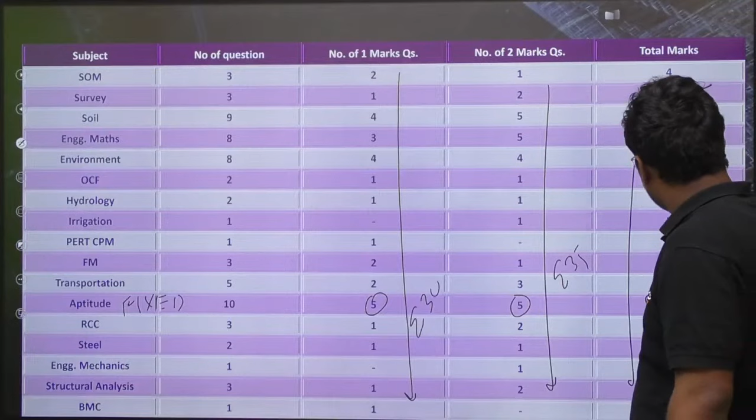If you see the cumulative sum, it will be 30, then 35, then 100, and then 65. So the pattern will be exactly as GATE today.

Okay, now before that, let me tell you about the cutoff also.

If you just want to clear the cutoff, cutoff will be approximately 32 marks, if difficulty level is not one of the most difficult papers in the history of civil engineering, nor one of the easiest, and in today's mock test also it will be this. If you want IIT, go for more than 64 marks.

If you want PSU, go for more than 78 marks, that is all India rank now 350. Earlier in 2021, even all India rank 100 was not getting PSU, but now the seats are more, that is why I'm saying this. For IIT you should be getting all India rank less than 1400-1500 or so. This is the cutoff, or the expectation, for today's mock test also.

This is the cutoff or expectation for today's mock test also. Let's begin with question number 1. Excellent.

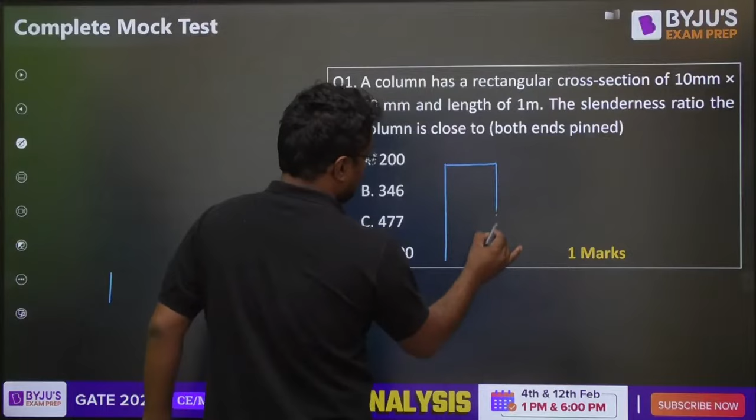A column has a rectangular cross section of 10 mm into 20 mm. This is 10 mm, this is 20 mm, length is 1 meter. The slenderness ratio is asked.

Everybody please let me know in the comment section - lambda, slenderness ratio is asked. This is a 1 mark question. Okay, nobody till now?

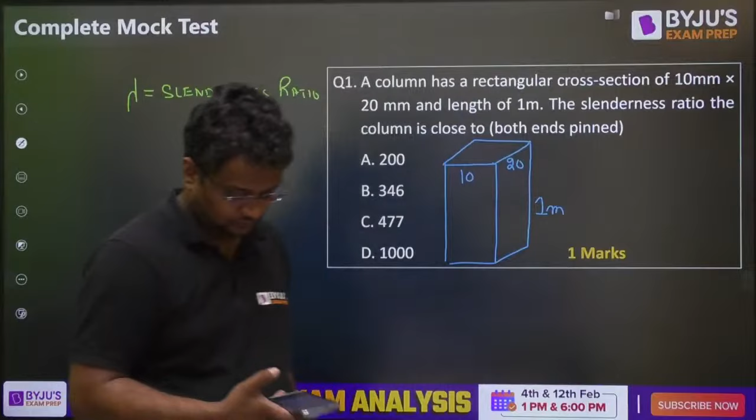Now since both ends are pinned, lambda is equal to L effective by R minimum - everyone please see, this PDF will be given in our Telegram groups. For both side pins, L effective will be 1 meter, that is 1000 mm, upon R minimum. Now what is R minimum? R minimum is equal to root of I minimum by A.

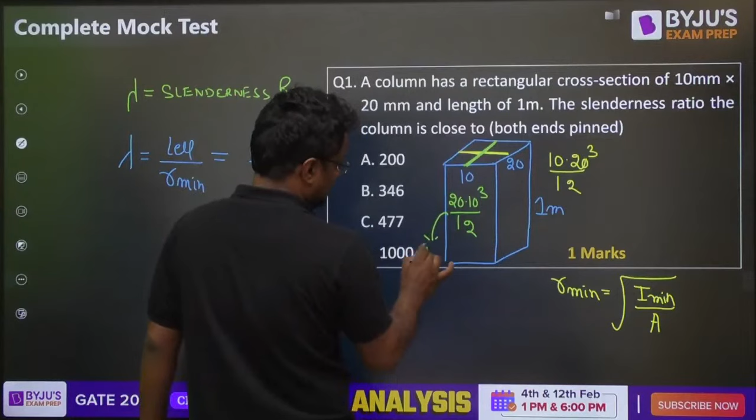Nobody is giving, come on, give me the answers. Now I minimum about this axis is equal to 10 into 20 cube by 12. And I about this axis will be 20 into 10 cube by 12. Of course this is the minimum, about this axis it will be the minimum, yes or no? So the minimum one is not this - minimum one is 20 into 10 cube by 12.

What is area? Area is 10 into 20. Now from here the value is coming to be, please check, 2.88 into 10 to the power minus 3 meter. Are you getting the same value, everybody?

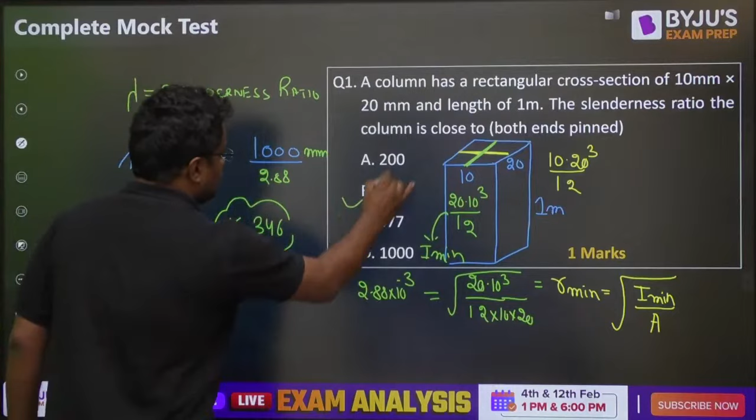2.88 into 10, if I convert to mm, this comes approximately to 346. That is option number B. Give me yes or no, guys.

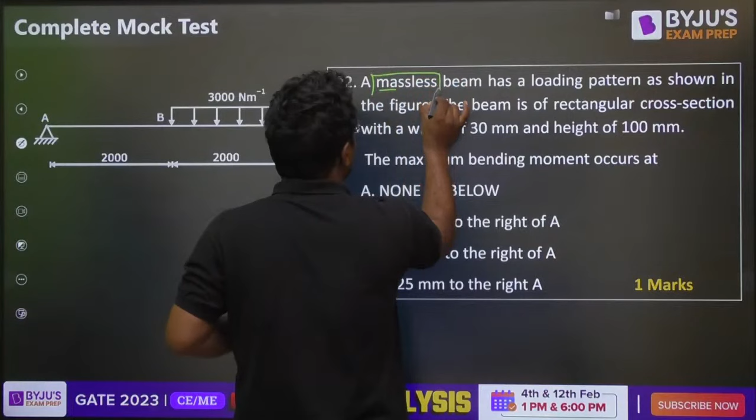Question number 2, this is a massless beam - even this word is useless, they wasted the ink, because unless mentioned, we take it massless. Even if this word is not written, we will take it massless. Unless the density is given or unit weight is given, only then will we take it as having mass, otherwise we take it massless.

If you want, guys, do you want to know the difficulty level of SOM and FM? After this question we'll be doing that.

Now, a massless beam has a loading pattern as shown in the figure. The beam is of rectangular cross section with a width of 30 mm and height 100 mm. The maximum bending moment occurs at...

Everyone, see the shear force diagram will be something like this. This is the shear force diagram. And if I talk about the bending moment diagram, positive and constant like this, like this, like this - the bending moment diagram will be like this. Now, of course, we want to find out the positive.

Positive magnitude like this, negative magnitude wise increasing like this, so of course here will be the bending moment maximum.

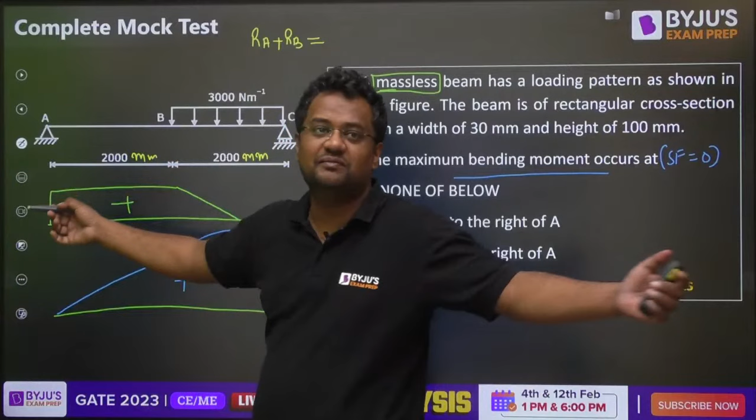Now let us find this. Guys, RA plus RB, the upward load, RA plus RB equals 3000 into this length in mm - 4000 meter, 4 kilometer beam will not be there. 4000 mm means 4 meter beam. So RA plus RB equals 3000 into 2 meter, that is 6000 Newton.

RA plus, in fact RC, RA plus RC is 6000 Newton. Now, summation of moment about any point equals 0. So RA into 4, clockwise, 4000 means 4 meter, and 6000 Newton acting at the center of mass here at 1 meter, so 6000 into 1. From here, RA value equals 1500 Newton or 1.5 kilonewton.

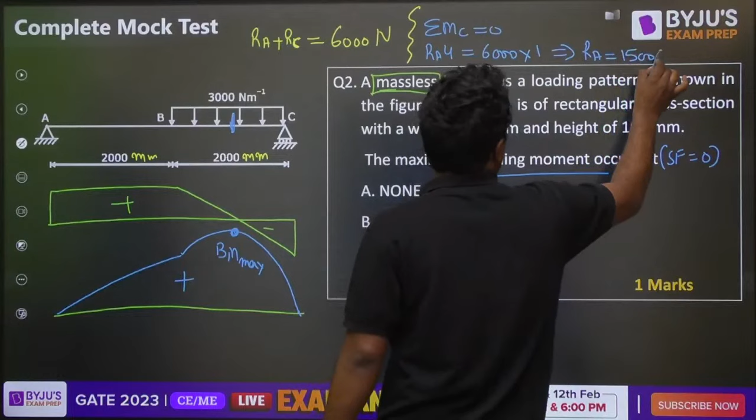So this is 1500, this is 1500, so this will be 4500. Are you getting the same value? Please let me know, 1500 and 4500. RA is equal to 1500. Check my calculations, everyone out there.

Check my calculations. Okay, now if I write where shear force will be zero, let us draw a section here and X from here. Shear force at XX, from the right hand side, is RC 4500 minus WX, that is 3000 into X, and this has to be 0.

So X value will be 1.5, so X will be 1.5 meters, that is 1500 mm. And if it is 1500 mm from here, total is 4000, so that means it is 2500 mm from here - 2500 to the right of A, that is C. Have you got the same answer?

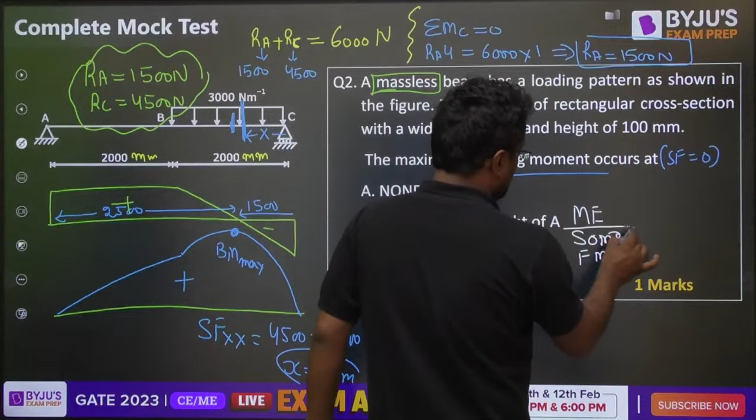Now before going to question number 3, let me tell you about the mechanical analysis. The SOM was of 8 marks, and FM was of 9 marks, and SOM questions were easy, FM questions were moderate. SOM - one question was from Mohr circle, one question was from thermal stresses, one question was the easiest question of all, stiffness.

It was asked what is the stiffness at point A. So delta at point A is PL cube by 3EI. So what will be the stiffness? P by delta, so P by delta will be 3EI by L cube.

Me and Joshit Sir will be taking that session also of SOM and FM of mechanical. So SOM was of 8 marks, FM was of 9 marks. It is always asked like this there. And the difficulty level of SOM was easy, FM was moderate, and maths and aptitude was slightly more than average.

Now this is question number 3. Everyone on the comment section, please let me know the answer.

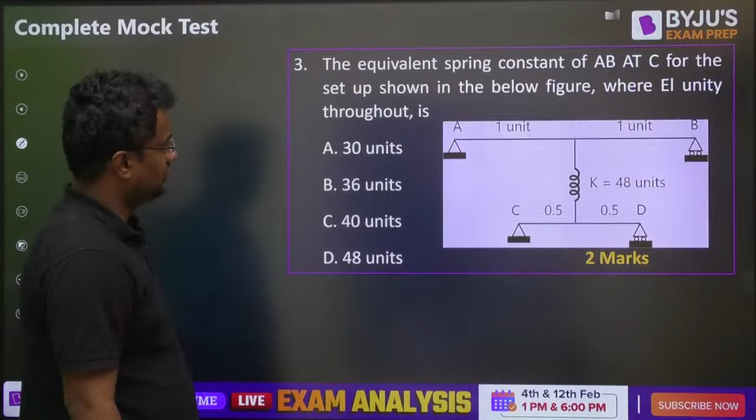Question number 3. The equivalent spring constant at AB at C for the setup shown in the figure below, where EI is unity. Okay, let it be point O. What is the stiffness at O? Everyone on the comment section.

Guys, we have done this kind of question before also, so it is not anything new to you.

Now if I draw this differently, see, all parts differently. This is A and this is B. This is C and this is D, of 0.5, 0.5. Let some load P come here. See the concept, this is a 2 marks question. P is coming here, 1 unit, 1 unit. So it will cause some deflection, this will go to some deflection.

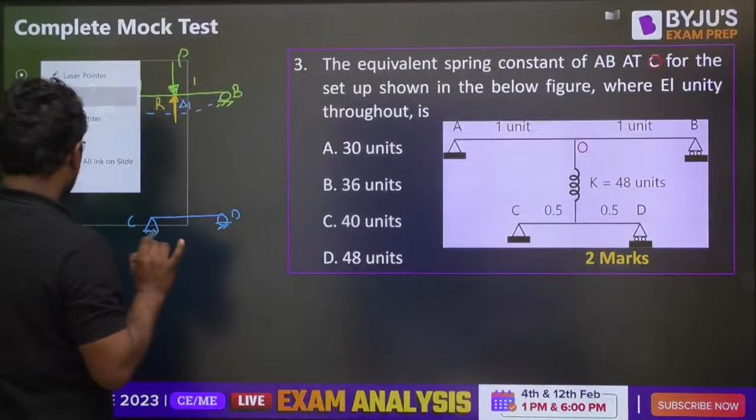Suppose delta 1. And guys, it will not be only P - from the bottom there will be some reaction also, R, because it is touching here. There will be some reaction also. Now this will be a spring, so R will be here, downward in it.

So for balancing, R will be here, and again R will be transferred here. Any doubt in this free body diagram?

This P is here. If we apply P, then there will be some reaction from the spring. R downward for balancing, balancing this and this R.

Now, what is the stiffness, guys? This is a 2 mark question. Stiffness is at point O. What is the load at O? And what is the deflection at O? This is the formula for stiffness.

P by delta 1. This is the stiffness formula, P by delta 1. Suppose here the deflection is delta 3.

Now, guys, I hope you can all relate this. Delta 2 is equal to delta 1 minus delta 3. There's a very important statement here: delta 2 is equal to delta 1 minus delta 3.

What is the deflection of the spring? Suppose this point goes 3 meters downward and this one goes 1 meter downward. This is 3, this is 1. So what is the elongation of spring? 2 meters.

Or what is the change in dimension of the spring? 2 meters, are you getting this or not? I am again saying, suppose this point is going 3 meters downward and this other point is only going 1 meter downward. So the spring elongation will be 2, or the spring deformation will be only 2.

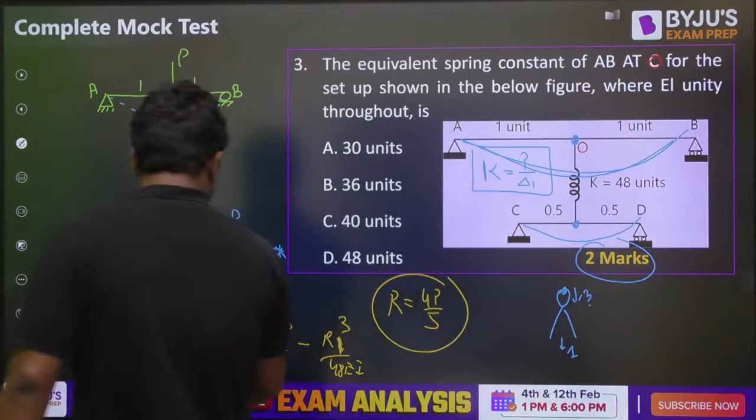From here, what is the value of R you will be getting now? 4 by 5 P. And once this is delta 1, put the R value in delta 1, you will get P by 30.

This is delta 1. Put the value of R, it will be P by 30. And once you put P by 30 here, K becomes 30 units.

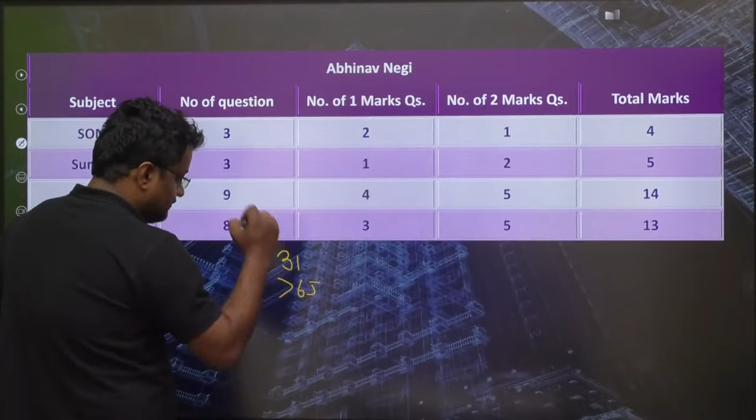Okay, so guys, after this, let me tell you again: cutoff will be around 30, 31, 32 marks for this test. More than 65 marks for IIT and more than 78 marks for PSU. So SOM is done, 3 questions we have done - 1 mark question, 2 mark question, and this was 4 marks.

SOM is done. Now let's go to the survey. Survey will again be 3 questions. Guys, why have I put this weightage? Because from last 3-4 years, the weightage of SOM is not that much more.

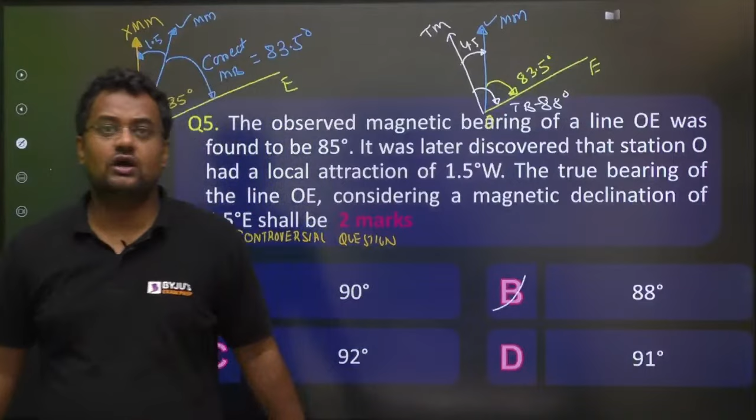Yes, now this was surveying. One more question on surveying. This is MSQ. And guys, now next we are coming with soil mechanics with a lot of MSQs. Everyone, please let me know this.

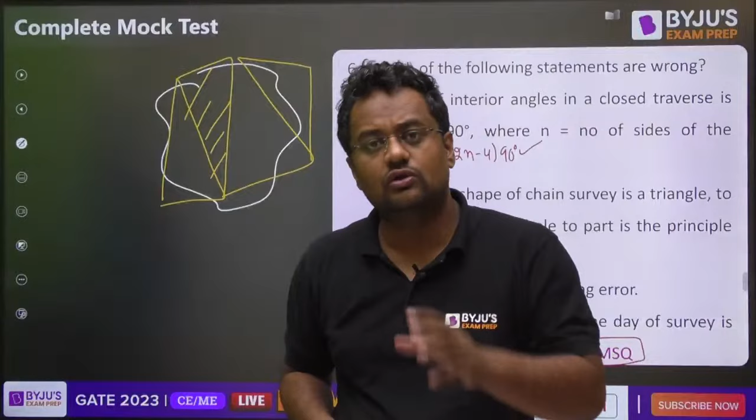Guys, in chain surveying, the basic shape is triangle. We divide our area into triangles so that we don't have to work on the bigger area, we can divide it into smaller areas, so the error will be less. Why? Because when you are measuring a distance like Delhi to Mumbai, you will make more error, but when measuring the distance of this marker, you will put less error. That is why we divide our areas into smaller parts. This is absolutely correct. Bad ranging is a compensating error.

Very logical — tell me, is this true or false? Please tell me in the comment box. Very logical — bad ranging is a compensating error. I want to see the answers in the comment box.

Bad ranging, true or false?

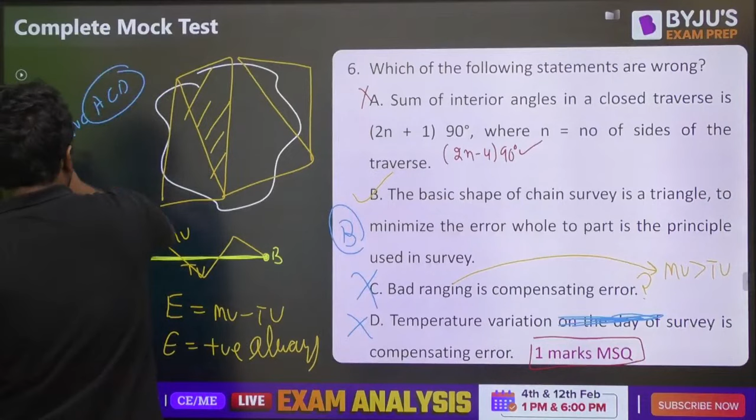And sir, how is it MSQ then? Guys, I am telling you, from the last 2 years, since wrong is asked, the answer will be ACD. Now let me tell you, even if they are asking right now, then also it is MSQ, because actually MSQ is a subset... MCQ — MSQ means option 1 may be correct, option 2 may be correct, option 3 may be correct, option 4 may be correct.

Okay, so moving further now. See, this is done — SOM is done, survey is done. Now we are coming to soil mechanics. MSQ, 1 mark, fast. And guys, I will be putting the PDF in my Telegram group, and all other faculty will be putting it in their Telegram groups too.

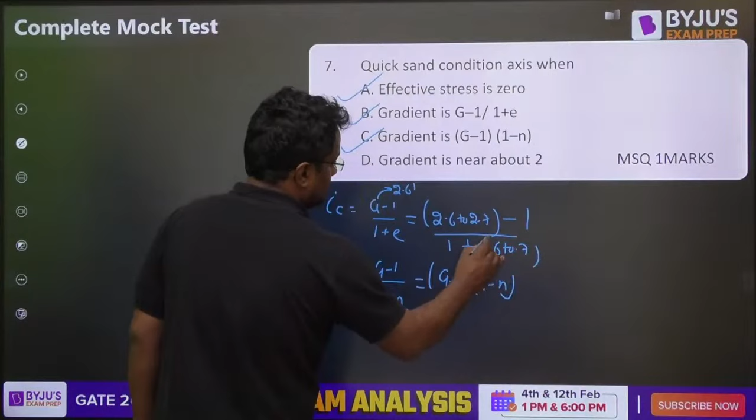Okay guys, quicksand condition: effective stress is 0. Gradient is G minus 1 upon 1 plus e, after derivation sigma bar equals 0. If you put e value equal to n upon 1 minus n, you get this. C is correct, and gradient is C. G is around 2.6 to 2.7, minus 1, and e is 0.6 to 0.7. So this value is nearly about 1. So answer will be A, B, C.

Most of you are correct here because I know most of you are champions.

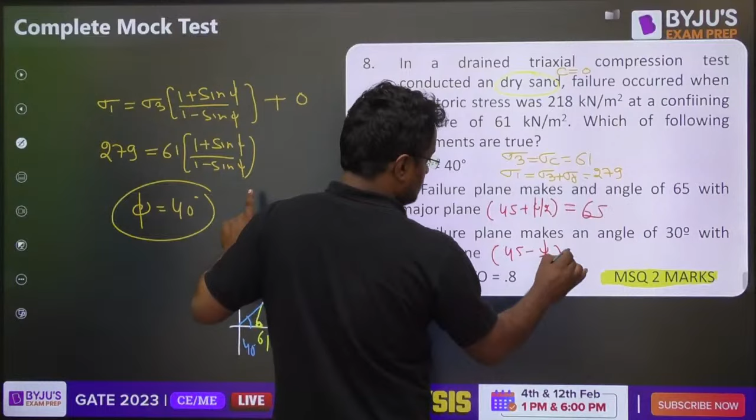Correct, phi is 40 degrees. Correct, it is 45 minus phi by 2, so 45 minus 20, it will be 25. And void ratio you can't predict. So answer will be A and B.

Have you got it? Everyone, please let me know if there's any doubt. Okay, let's move further now.

How is D wrong? How will you calculate void ratio?

Aditya, I have eaten less food in the night, that's why the capital is New Delhi.

So this has nothing to do with void ratio. Now this is a 1 mark question, MSQ, 1 marks.

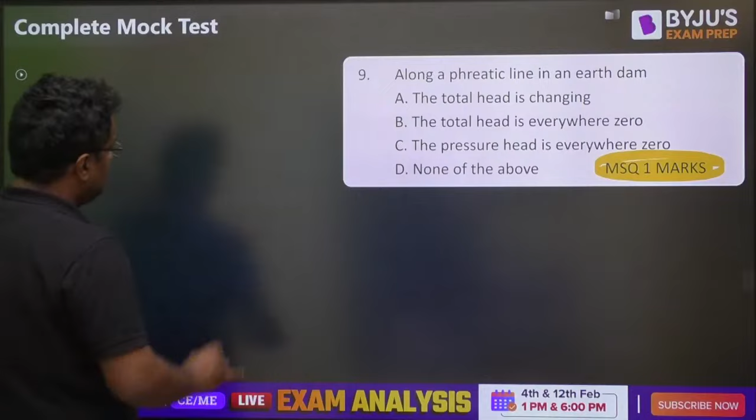Phreatic line is the top flow line, guys, of a dam. Okay, the total head is changing. Why? I'll prove this. Total head is equal to pressure head plus velocity head plus datum head. Pressure head is constant here, because everywhere pressure is atmospheric, and velocity head in soil is also always 0. So this is constant at the phreatic line.

Now datum head: datum head is not constant. Gradually datum is decreasing, gradually datum head is decreasing. So total head is changing. Have you understood the concept? The total head is changing because pressure head is constant (always atmospheric pressure), velocity head is 0 in soil mechanics, but datum head is changing, so total head is changing.

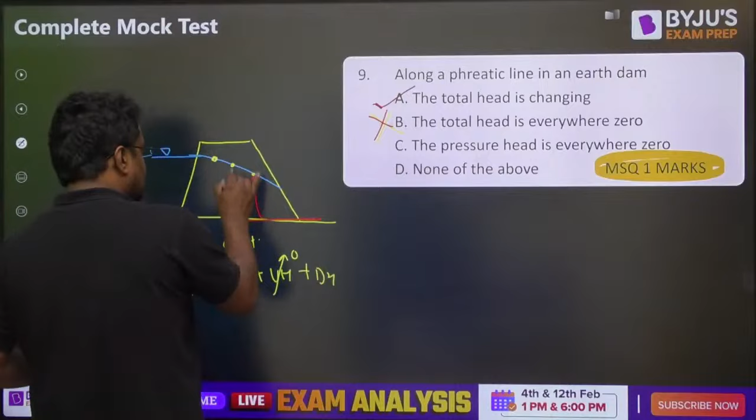The total head everywhere is 0 - no, that depends on the datum, wherever you put it. If you put the datum here, how is total head changing? Datum head is this much. The pressure head everywhere is 0.

Yes, that can be said to be correct - atmospheric pressure. If I talk about this, it should actually be written as gauge pressure other than atmospheric, so yes, it will be 0. So the answer is A and C.

Now this 10th question, excellent guys, again this is an MSQ. Everyone, these are the real questions that can be expected in the GATE exam also - these kind of beautiful questions.

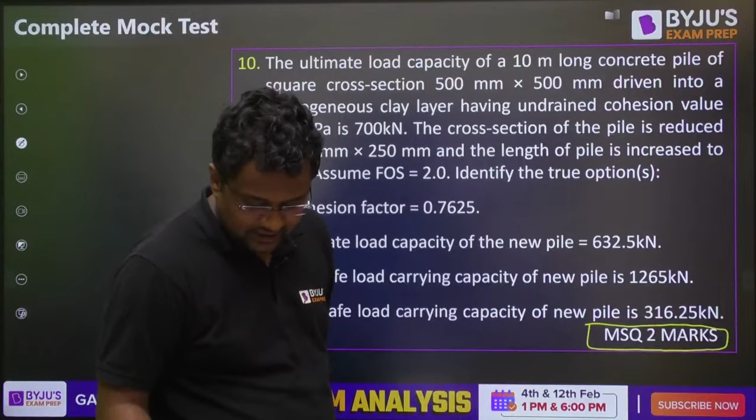I have already calculated the values in the night so that your time should not be wasted. The ultimate load capacity of a 10-meter long concrete pile cross section area is this.

10-meter long and cross section is 0.5 meter into 0.5 meter is given. QU value is given 700 kilonewton. What is QU? QU is C into NC into area base plus alpha C into AS. Q is known, C is known, C is how much? 40, NC is 9, area base is 0.5 into 0.5.

Alpha is not known, C is known, area surface is known. From here you can find out the alpha value. From here the alpha value is 0.7625, one equation, one unknown. C is known, 40 kilopascal, QU is 700, NC is 9, area base is 0.5 into 0.5, alpha not known, C is 40, AS is area surface, 0.5 into 10 and such 4 surfaces.

Okay, ultimate, what is happening now? Now the cross section, I am writing the original question with white color. Now the new changes I am showing with orange color.

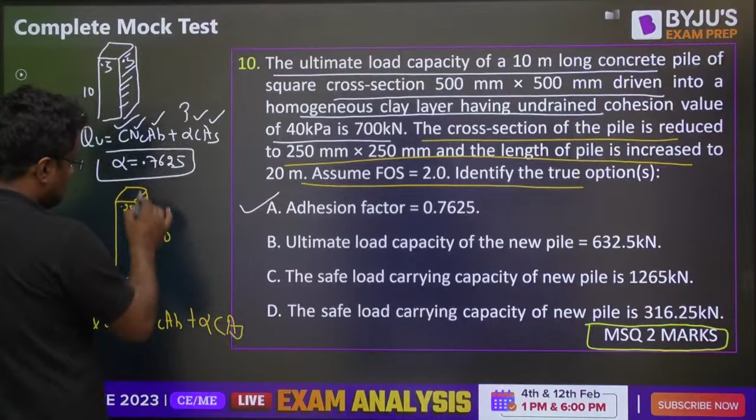Now the cross section is reduced, and the length of the pile is increased to 20 meter. Earlier it was 10. Now it's 0.25 into 0.25. Now what is asking? Ultimate load capacity. So again for QU, C is known, NC is 9, area base is 0.25 into 0.25. Alpha you have got, C you know, area surface is 0.25 into 20 and such 4 surfaces. So from here the value you will be getting is this one.

What is the safe load capacity of new pile? This is the ultimate. The safe load carrying capacity of new pile is 1265. How it can be? Safe load means application of factor of safety. How it can be more than 632? Here the safe load carrying capacity of new pile is, this load 632 upon factor of safety 2, so this will be 316. This is absolutely rubbish here.

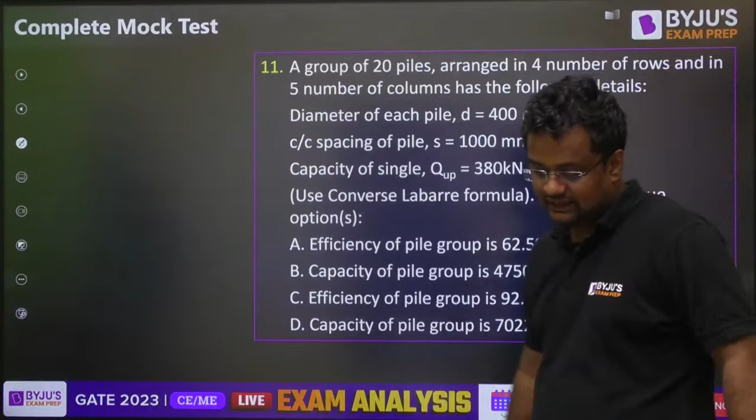Okay, now 11th question. 380 kilonewton. What is theta? Converse formula we have to apply. Now tan theta was D by S. What is D? 400 mm and what is the spacing? Spacing is 1 meter. So tan inverse of 0.4 by 1. So what is the value of theta? 21.8 degree.

Okay, now the Converse-Labarre formula, group efficiency is given by 1 minus theta by 90, into m into n minus 1 plus n into m minus 1, all upon m into n.

And what is m? Number of rows and number of columns. Number of rows are 4 and there are 20 piles. So n is equal to 4, m is equal to 5. Then only the 20 piles will be there, right?

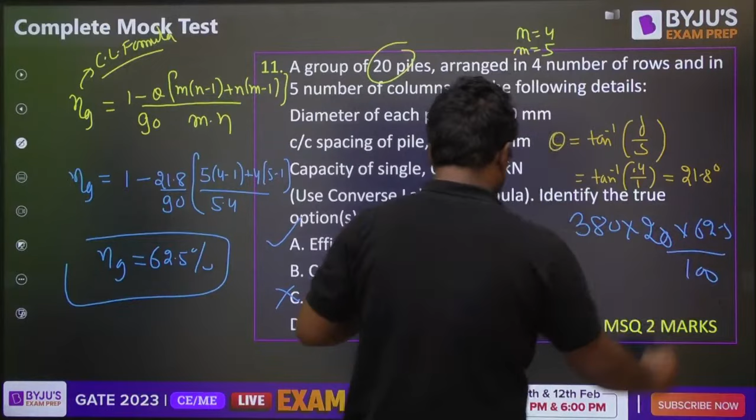So 62.5% is correct, that means 92.4 will be wrong. Now what is asked? Capacity of pile. Now what is the capacity of single pile? 380. So 20 piles will be 380 into 20. One pile is 380, so 20 piles will be 380 into 20. But efficiency is 62.5%, so we have to multiply this factor also. And this will be coming as 4750.

4750. Have you got it now? Everybody got it now? Everybody got it now?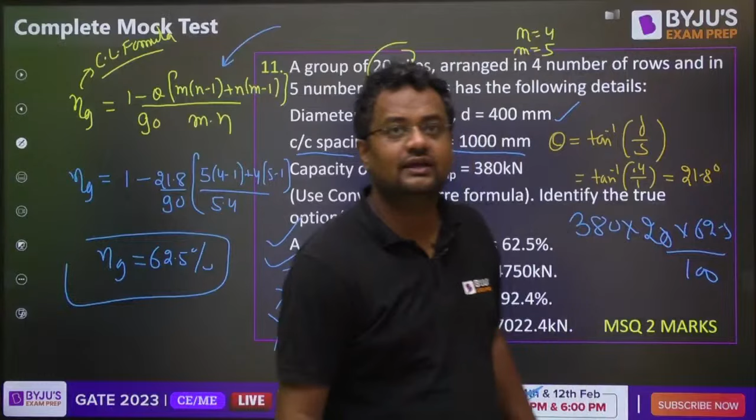Dal Lake is fine. Okay Danish, my father is also posted there. He's been there for the last 2 years, his hotel is just 0.1 kilometer from Dal Lake. I guess the hotel name was Santoor Hotel, I don't know, or maybe Taj, I don't know what the name was. I've been there.

Okay, now moving to the next question.

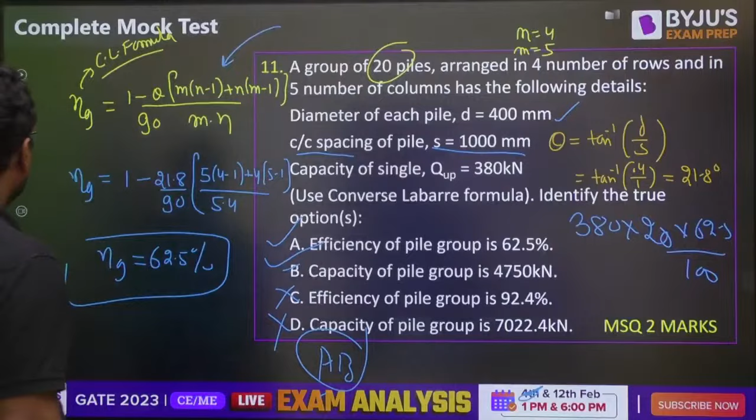A 2 meter by 4 meter rectangular footing has to carry a uniformly distributed load of 120, as per 2 vertical is to 1 horizontal dispersion method of stress distribution, find the increase in vertical stress. Okay got it sir. What is the load? Load is 120 into area. Area is 2 into 4, so 120 into 8 is 960. Now the load dispersion rate is 2 vertical is to 1 horizontal.

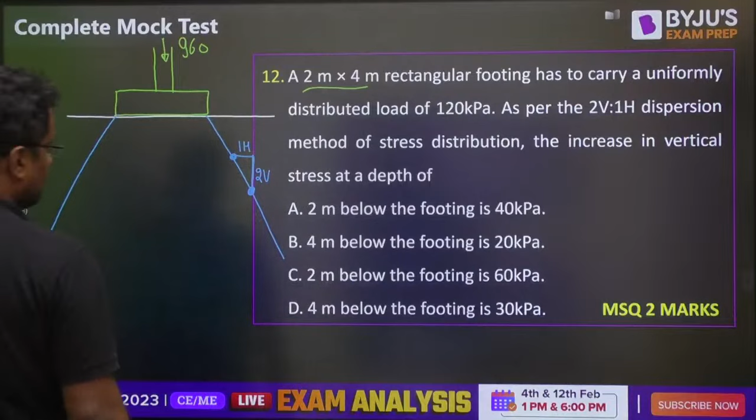Now what is the stress at a depth of 2 meters below? First let us do the calculation for 2 meters. Suppose this is 2 by 4 meter, it can be made 2 meter also, it will be same. So when we go one down, 2 vertical is 1 horizontal, so 1 vertical means 0.5 horizontal. So from here to here, 1 vertical is 0.5 horizontal, meaning 2 vertical is 1 horizontal. So for 2 meters, it's 1 and 1 on each side. Stress is 960 by area. So 4 plus 1 plus 1 on both sides, and perpendicular to that also it is 2 meter, so 2 plus 1 plus 1. Even if you make it 2, the answer will be same. So sigma is 960 upon 6 into 4, which is 24. 960 by 24 is 40. So at 2 meter below, it is 40 Pascal, not 60.

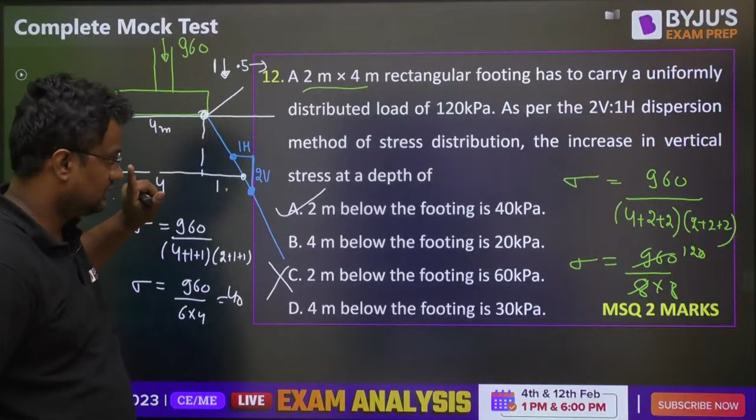Similarly, if I want to find the stress at 4 meters below: load is 960. At 2 meters below it was 1 and 1 on each side, so if we go 4 meters down, it will be 2 and 2. So 4 plus 2 plus 2 on one side, and perpendicular 2 plus 2 plus 2 on the other. Sigma is 960 upon 8 into 8... let me check, 8 into 6. So 960 by 48 is 20 kilopascal. A and B, yes everyone.

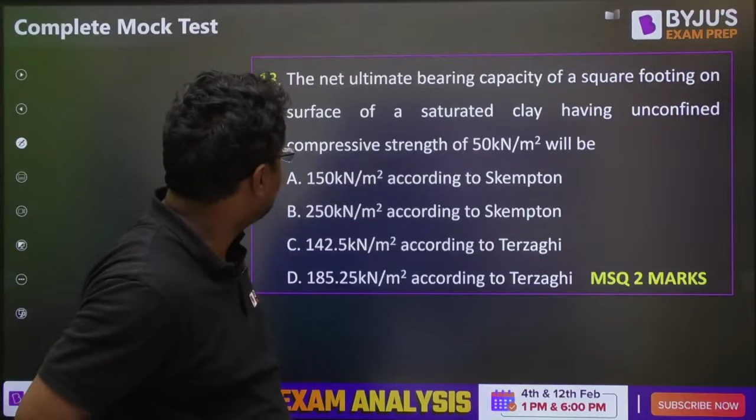The net ultimate bearing capacity of a square footing - quickly tell me, should it be calculated as per Skempton's or Terzaghi's method? Everybody answer fast in the comment section, after me Richa ma'am will be coming. QU is given as 50. So as per Terzaghi, what is the value?

See, first of all, C will be QU by 2, na, since QU is also called UCS by 2. So this is 25. Now the net ultimate bearing capacity as per Terzaghi is C into NC. Wait, it's written as square here too, don't make this mistake in the exam - directly apply the formula C into NC. So it will be 1.3 into C into NC, that is 1.3 into 25, and NC if not given is taken as 5.7. What value does this come to? 185.25.

Now, as per Skempton, what is the formula? As per Skempton, the formula is QNU is equal to 6, 1 plus 0.2 df by b into c.

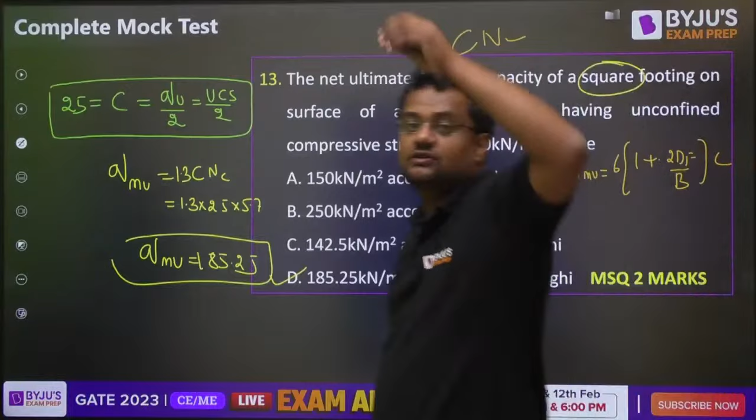Guys, as per Skempton, the simple formula is CNC, but NC depends on shape and depth. So for this particular value, square shape, this is the formula. Terzaghi has three terms: CNC plus QNQ plus half B gamma. Skempton is very easy, only one term for all cases, for square, for rectangular, no other term, only one term. Only difference is the NC value will be changing. For square, this is the value.

Okay, if you put it here: 6, 1 plus 0.2 df, df is depth of foundation, and footing is on the surface, so df is 0. C is 30... no, sorry, C is 25. So this will be 25 into 6, which is 150. Got it?

Got it? Everyone? Yes, Aditya Verma, it may come.

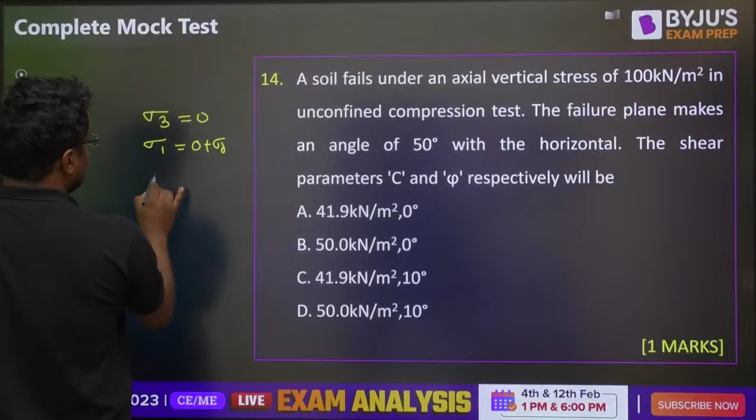A soil fails under an axial vertical stress of 100 in an unconfined test. Unconfined means sigma 3 is equal to 0, sigma 1 is equal to sigma d, sigma d is 100, so sigma 1 is 100, sigma 3 is equal to 0. The failure makes an angle of 50 degrees with the horizontal, so horizontal plane is the major plane, because the bigger stress, 100, is coming vertically. Sigma 3 is 0, unconfined. Horizontal is major plane, so for the major plane, the angle is 45 plus phi by 2, that is 50, so phi is equal to 10.

Phi is equal to 10 means these can't be the answers. This is MCQ. How will you find whether the question is MSQ or MCQ? It will be written, you don't have to play hide and seek there. Phi is equal to 10.

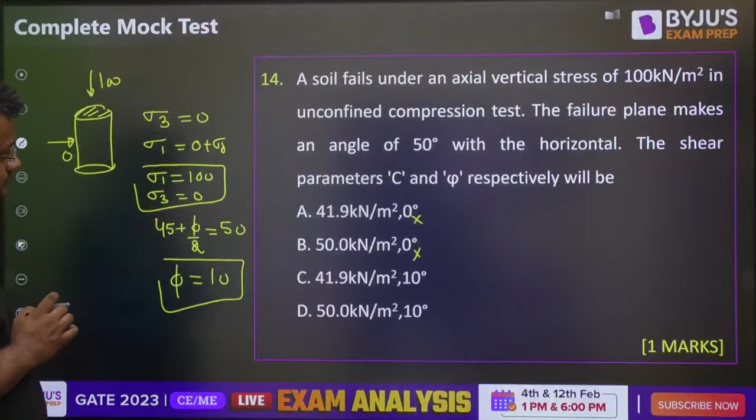Now we have to find C. If you apply the formula, sigma 1 is equal to sigma 3, 1 plus sin phi over 1 minus sin phi, plus 2c times square root of 1 plus sin phi over 1 minus sin phi - this is 100, this is 0, one equation, one unknown, you can find the value.

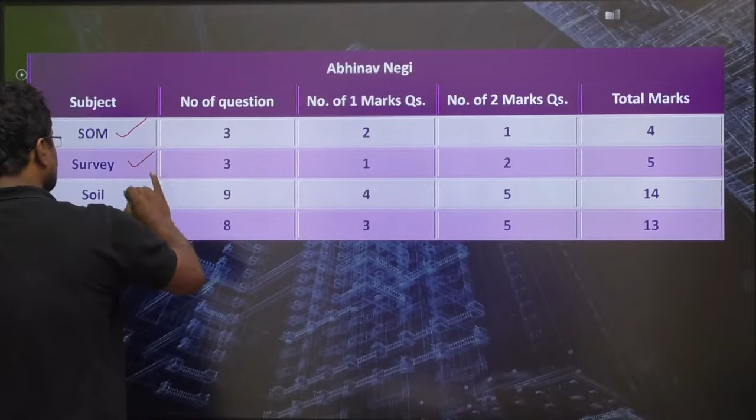Now guys, till now our SOM is done, survey is done, soil is done - 14 plus 5 plus 4, 23 marks is done. Now let's go to the maths. Do this one.

Everyone, please. From a pack of regular playing cards, 2 cards are drawn at random. What is the probability that both cards will be king? First king will be 4 by 52, that is 1 by 13 probability. Second, only 3 are left and total are 51, because it is without replacement. So this will be the answer.

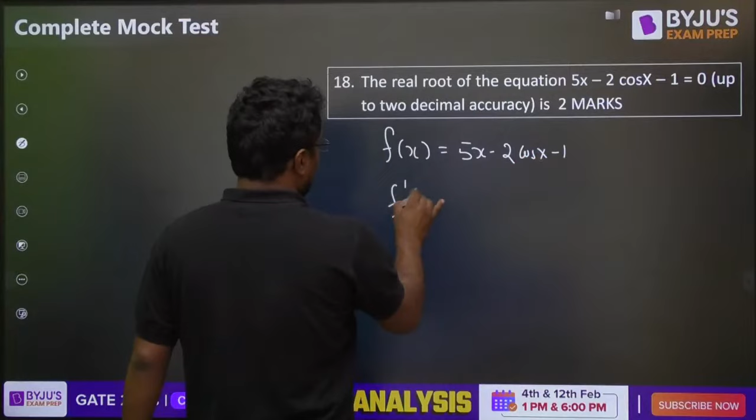You can apply Newton-Raphson. What is fx? 5x minus 2cos x minus 1. What is f dash x? 5 plus 2 sin x. Now apply Newton-Raphson. Newton-Raphson: xn plus 1 is equal to xn minus fx by f dash x.

I am not expert in maths guys, but I am trying to make this possible. I am not very expert in engineering maths. Up to 12th I was an Olympiad topper. In 12th I got 36th rank in National Olympiad, in 11th too. In 12th I got a CBSE merit certificate in maths, but I'm not sure with engineering mathematics.

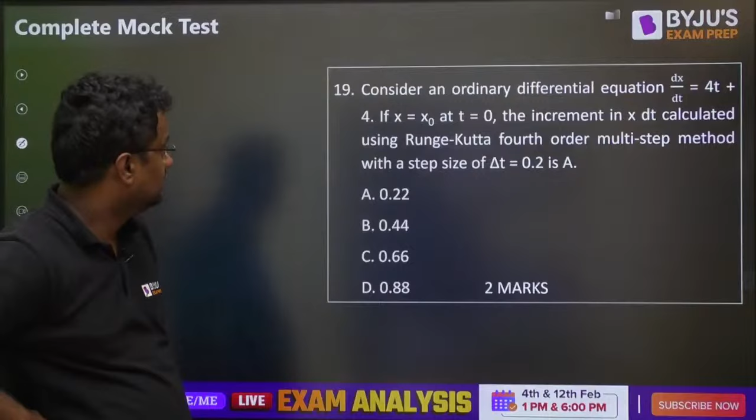No Aditya, tell me fast, from Newton-Raphson method what value is coming, everyone? It will be 0.88. Okay.

Do this one: a box contains 20 defective and 80 non-defective items. If 2 items were selected and removed without replacement, what is the probability that both items are defective? We had already done this type - the king question was the same. The same, we have done this here, the king question was same.

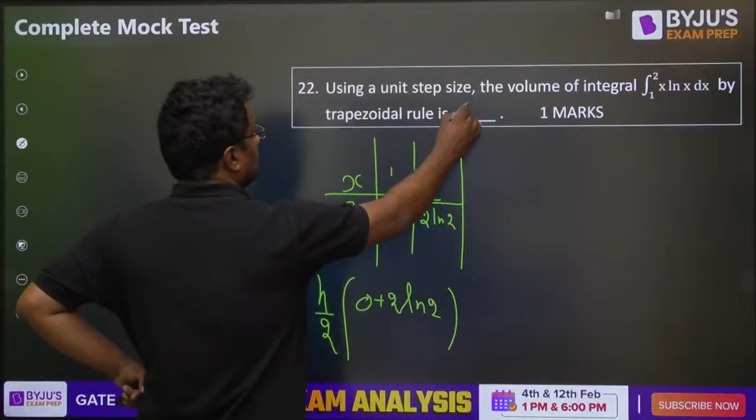Okay, trapezoidal method has to be applied. Trapezoidal means like the area of a trapezium: 0 plus 2 ln 2. Okay, this value h/2, what is this coming to? 0.693. We derive this in survey also, right?

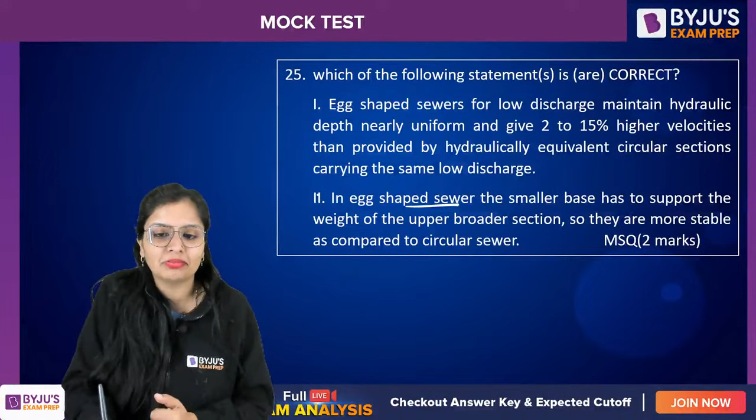Let me tell you, everywhere you would have basically read about it, but you are not remembering now. Circular shaped sewers are more stable. Here it is written egg-shaped sewers are more stable, so this is wrong. Circular sewers are more stable. They are resistant to corrosion, N number of things are there. They can fit easily, easy to carry, uniform stresses everywhere. So many advantages are there. So those who said 1, firstly Rishabh said, and others also said, that's correct.

Now this one, very very simple question. You know this, 1 marks question. You guys know this. Tell me fast.

The specific gravity of sewage is... think a bit. You know what, we are frightened of NAT and MSQ, but the real enemy is MCQ. We should be frightened of MCQ because 1 marks you won't get and 1/3 negative will also be done. That's why, slightly greater than 1. Whosoever is saying less than 1, no, it's 1.03, 1 point something. So it will be slightly greater than 1. So this you have to make sure.

Now this question, remember every time we have the habit, read this question. I'll tell you one thing before we do this question. Actually the formula for critical DO deficit, or basically critical oxygen deficit, you have is L by f, 10 raised to power minus KD into TC, where TC is the critical time. Make sure if it is not required, don't use that formula because you will be wasting your time in calculating critical time. So I told you another formula guys, remember, another formula which is comparatively easy. So you guys can use this formula, this will be much easier compared to that. f 1 minus f minus 1, D0 by...

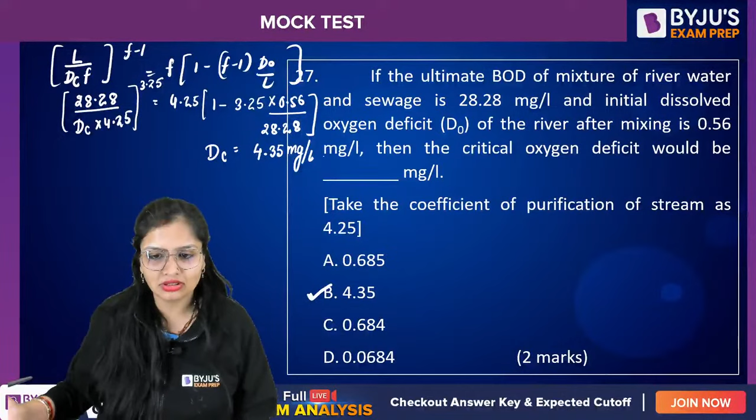How much is it coming? There are more MSQs, you wait, I have to strengthen your concept, so I can't say take a chance on MSQ guys. Come on faster, how much will it be coming? Simple, whatsoever calculation you get, 1 by 3.25, so the tension about power is over. How much is it coming? Yes or no, just check it out. Is it coming 4.35? Just check it out once. Yes? Come on then.

Okay this is for 1 marks. Remember this is important - if you are talking about yesterday's environmental science paper that came, I don't know if you saw the paper, I asked my students there. They asked database things, and you will be surprised, they didn't ask a question on activated sludge process. They asked one question regarding BOD, and there was a question regarding air pollution index, air quality index basically. There were many questions with database, if I'm talking about environmental science one. And last time they asked regarding ASP, but this time they haven't. So I have included this because consistently they have been asking in GATE. You don't know whether this year they will continue the legacy of ASP or remove it, we don't know about it. So at least we should keep it in mind that ASP, you cannot dare to leave and skip.

So theta C, QW, XU, XC - this question I have made you do quite a number of times because I want you to remember this formula, and not always assume XC is 0, because here effluent suspended solids is given to you, everything is given to you. Just volume of aeration tank is given to you, 10800. Mixed liquor suspended solids, 2400 mg per liter. QW into XU - how much is QW? 220 meter cube per day. How much is XU? 9400.

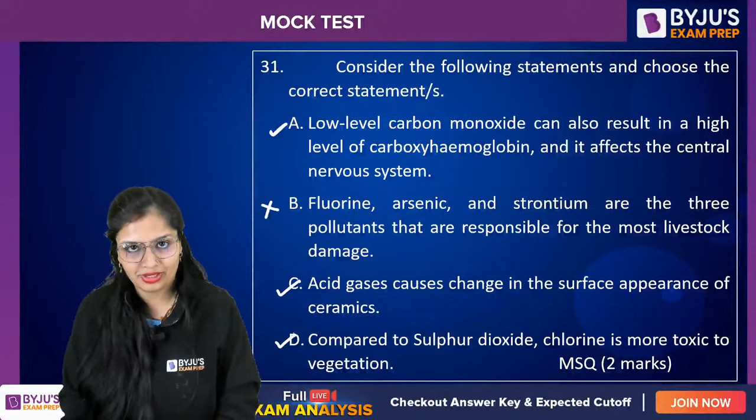Okay, come on, 2 marks question. This is sort of MSQ or MCQ. Guys, check it out. Calculate, you will know whether it is MCQ or MSQ.

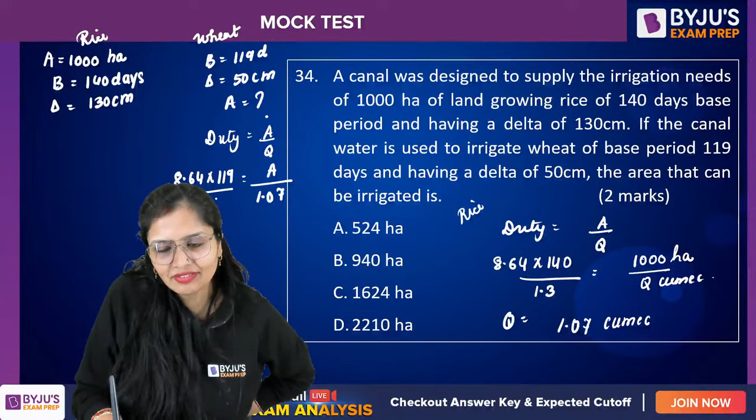You have to calculate area. Isme bhi wahi laga do phir. Duty is equal to area by Q. But here discharge is same, 1.07. Area you have to calculate. Okay, duty will be again 8.64. B is how many days? 119, and delta will be 0.5. How much is the area coming guys?

If same season crops were given, then this wouldn't be valid. In that case the question would have given data asking for the discharge, so we would have added both discharges. Rishabh, if same season crops had come, they would have given 3 crops, like rice, wheat, sugarcane. So rice plus sugarcane, or wheat plus sugarcane, whichever combination comes, you design for that. But if two same season crops come, then the question wouldn't be like this - they would ask for the total discharge, and you would add both discharges together. Clear?

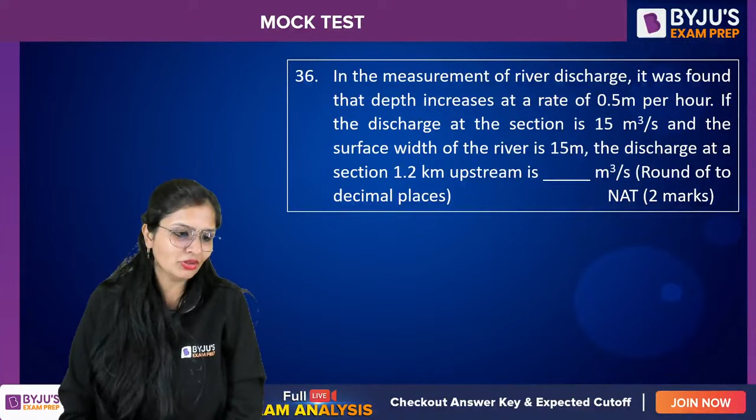35, 36, ये मजेदार क्वेश्चन है। Maximum students, I bet you haven't memorized this formula. Once upon a time, in 2000 something, the question was asked regarding it, and after that, never ever have they asked this question. Come on guys, I think you haven't even read it. Unsteady uniform flow condition, guys, I know - tell me, does anyone remember it?

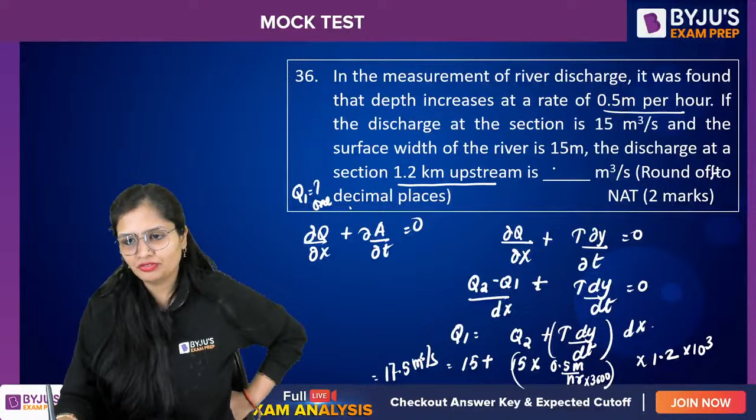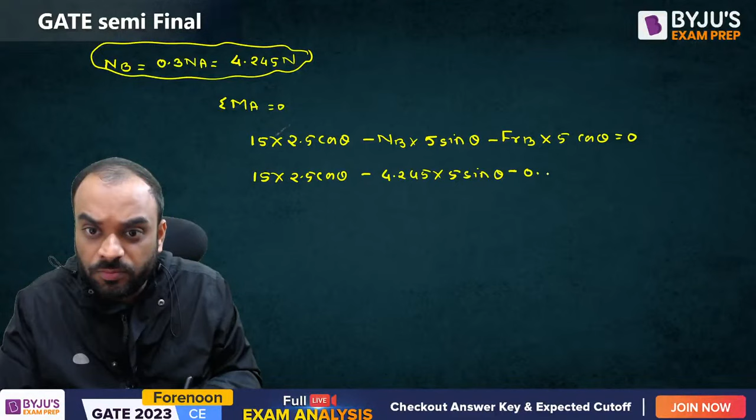0.2 times of NB, and NB is equal to how much? It is again 4.245, multiplied by 5 cos theta is equal to 0, correct? So let's solve the question, guys, to get the value of theta. How much it is? This value is coming around 37.5 cos theta, and this value is minus 0.2 into 4.245

Multiplied by 5. So this value is coming around, let me erase it, the total value which we are getting: (15 into 2.5 minus 0.2 into 4.245 multiplied by 5). So this value we are getting as 33.255 cos theta, and it should be equal to 4.245 multiplied by 5. This value is coming around 21.225 sin theta.

Now you can write here, guys, tan theta is equal to how much? It is 33.

Sir, NA is coming around 14.94. Let me check. Are you sure? It is coming around 14.15. Kindly check it, Swapnil. Kindly check it. We are getting 14.15. Kindly check it. Okay. All of you are getting 14.94. Please check it once. Kindly see this particular value, 1 plus 0.2 multiplied by 0.3, that is 1.06, correct? 15 divided by 1.06, it is coming around 14.15, yeah. If you are dividing it by 1.6, then I don't know, I think it is 1.06, correct? 15 divided by 1.06, how much you are getting? 14.15, correct? 14.15 is the correct answer, okay?

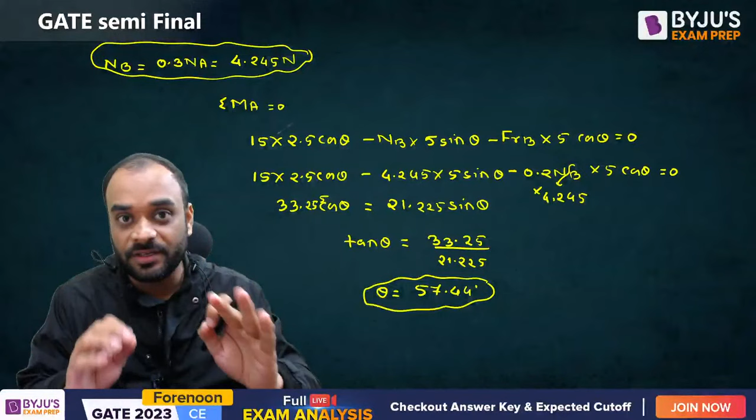And this is the NAT type question, numerical answer type question. Guys, you have to solve such type of question in the examination also. And please remember this, right? That's why don't get any type of confusion in the calculation. Please do each and every calculation sincerely and write down each and every step in the calculation part, right? So that it will be much better so that we don't forget any value. So that we will not forget any kind of value which we have calculated earlier also. Okay, so please write down, and if you find any kind of mistake in the calculation, so that you can cross verify it whether you have written the wrong equation or it is correct one.

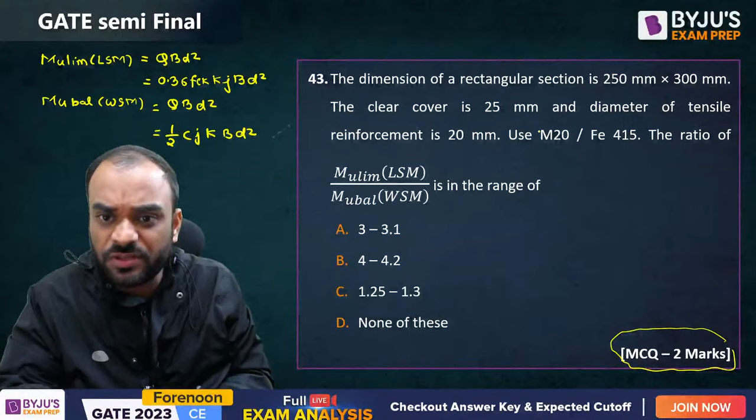So you know what this value exactly is, because we have already calculated it. What is the value of Q as per the LSM method earlier also? In this case they have already written M20 you have to use and FE415. Now tell me, for FE415 and M20, what is the value of Q?

2.7648. The same value we can use which we have calculated in the previous question. Now what is the value of C in case of WSM method? It is nothing but sigma CBC.

So for M20, sigma CBC is 7 Newton per mm square. What is the value of K? To find out the value of K, you need to calculate the value of modular ratio. So M is equal to how much? It is 280 by 3 sigma CBC.

Please calculate this, I think it is coming around 13.33, correct? So M is equal to 13.33. Now let's calculate the value of K and J. K is equal to 13.33 multiplied by C, where C is 7, divided by 13.33 multiplied by 7 plus T.

So T is equal to sigma ST. For FE415 it should be 230. Okay, kindly solve this. How much are you getting? 13.33 multiplied by 7...

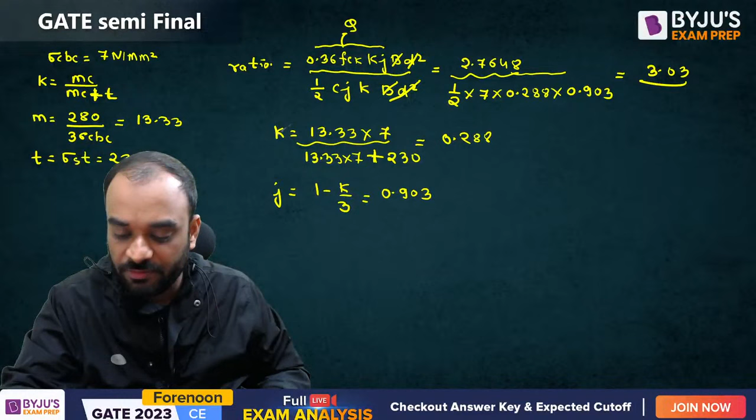Now tell me which is the correct option. Which is the correct option? A, B, C, D.

Very nice, very nice. So A is the correct answer for the problem. A is the correct answer for the problem. Very nice, Krishna. Very nice, Swapnil. Good, good, good, good, good, guys. Very nice, Imtiaz.

Okay, let's move to the next question. Now this question is related to the pre-stress condition. Let's read the question. Very important one, again this is MCQ type question, 2 mark problem.

A rectangular concrete beam whose width is 250 and depth is 600, is pre-stressed by means of 4 10mm dia high tensile bars located at 200mm from the soffit of the beam, that means from the bottom of the beam. If the effective pre-stress in the wire is 500 Newton per mm square, what is the maximum bending moment that can be applied to the section without causing tension at the soffit of the beam?

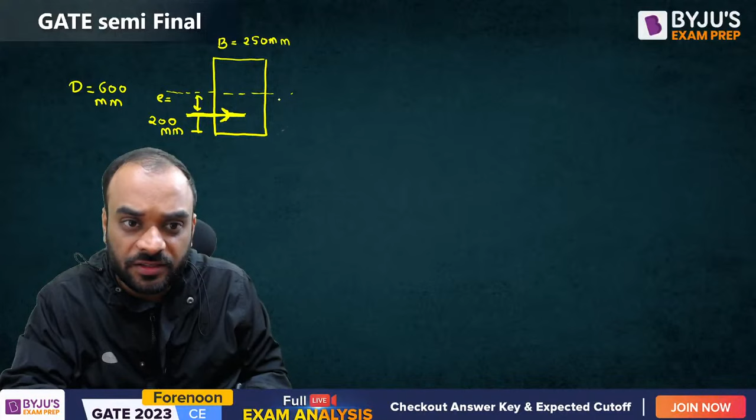E is equal to how much right now? If it is 600, then this distance will be equal to how much? 300. 300 minus 200, it is equal to how much? 100 mm. That means eccentricity is 100.

Now tell me guys, what are the various type of stresses which is applied by the pre-stressing force? One is direct compression, which is plus P by A. Second is bending compression and bending tension, right? So at the top fiber we will have tension and at the bottom fiber we will have compression.

Like this. This value is negative, this value is positive, and how much it is? PEY by I, right? Now you know that guys, if you apply certain load on the beam, then what will happen? Tension will be coming at the bottom and compression will be coming at the top. That means due to external load, the stress diagram will change like this and will become positive and this value will become negative and you can write MY by I.

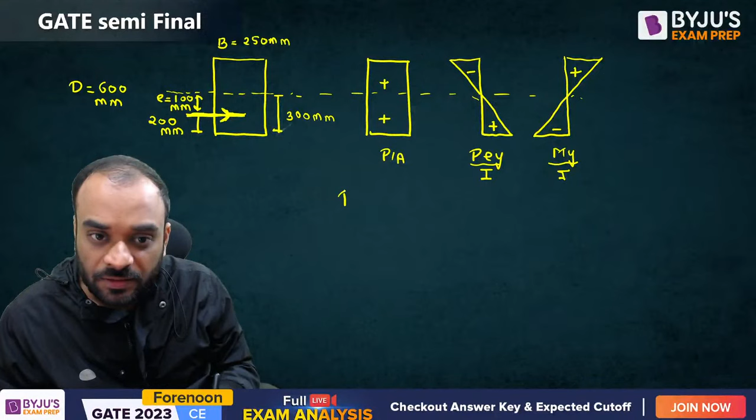Clear? Now guys, let's add all the stresses which is present at the bottom. P by A plus PEY by I minus MY by I. Now you need to put the value to get the answer, right?

So what is the value of P? Let's calculate it. P is equal to how much? Pre-stressing force is equal to how much? Stress multiplied by area. So what is the permissible stress? 500. Let's see once again. 500. And 4 bars are there whose dia is 10 mm. Okay, so 4 into pi by 4 into 10 square.

How much you are getting? 157,079.63 Newton. Kindly check this calculation. You will get the same answer, right? And let's put other values so that we will get the value of moment, how much moment are required.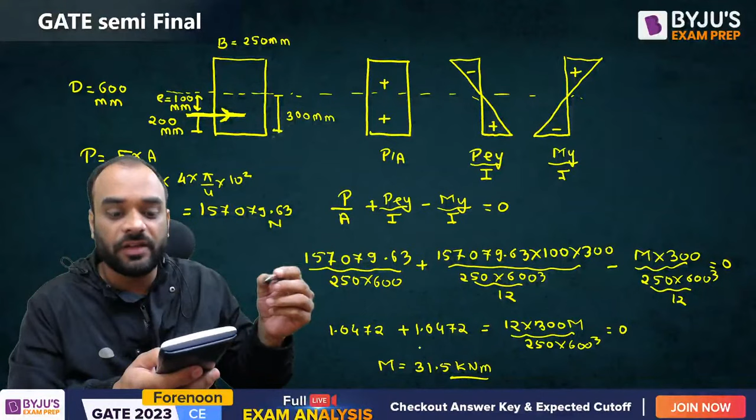Yes, we are getting a value of 31415926, right? If you divide it by 10 raised to power 6, you will get 31.5 kilonewton meter. So which one is the correct answer? C is the correct answer. C is the correct answer.

Crystal clear to all of you? Crystal clear? Very nice. Now let's move to the next question, guys, which is related to the structure part.

Very simple question. It is based upon the static equilibrium equation alone, and it is based upon a truss analysis. Now let's read the question, guys.

Now what I will write here, guys, summation moment at point A is equal to 0. You will get the answer. Tell me, guys, what should be the answer for this question? Please let me know, I'm writing it.

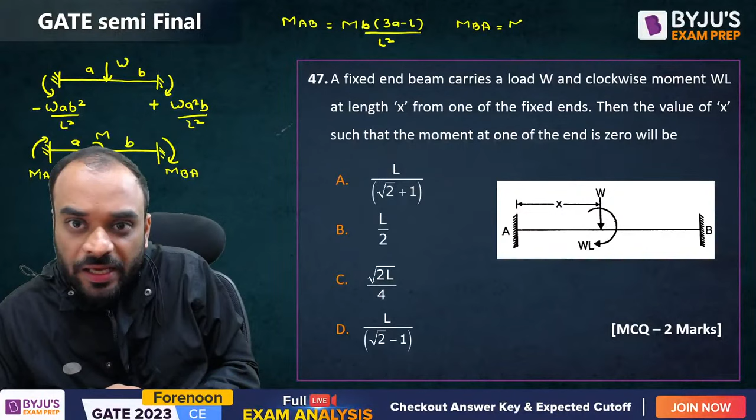And the second condition is if we have a concentrated moment placed at a distance A and a distance B, then what is the moment here? This is MAB and this one is MBA. So MAB will be M into B into 3A minus L, divided by L squared. And MBA will be M into A into 3B minus L, divided by L squared.

But guys, you need to check, if you add both conditions together, because such type of loading is given on the structure, then the net moment should be zero at any of the supports. Now you can see here guys, the direction of this moment and the direction of this moment is the same, so it is additive.

But if the moments are in opposite directions, then their algebraic sum equals 0, and that we have to consider. According to that we will get the answer. So let's write it down. This value is negative because it is anti-clockwise in direction. So minus WAB square by L square, and the second one is MAB, which we will write as MB into 3A minus L divided by L square, and it should be equal to 0.

So guys, value of W is equal to how much? It is W only. Value of A is equal to how much? A is equal to X. B is equal to how much? It is L minus X.

L minus X square divided by L square, plus the moment value which is already given, which is basically W into L. So W into L, B is L minus X, 3X, A is X basically, minus L divided by L square, and it should be equal to 0.

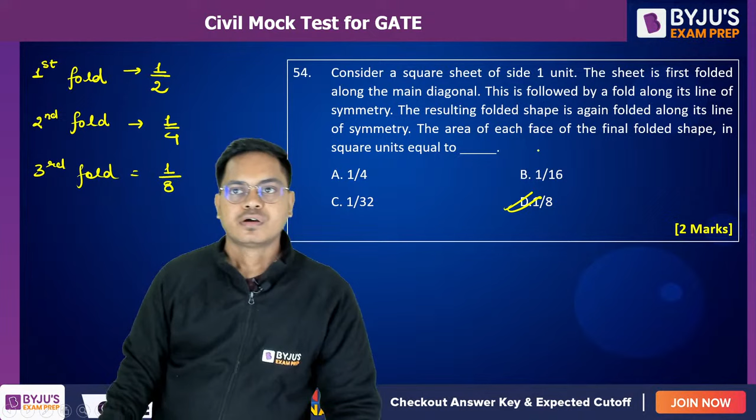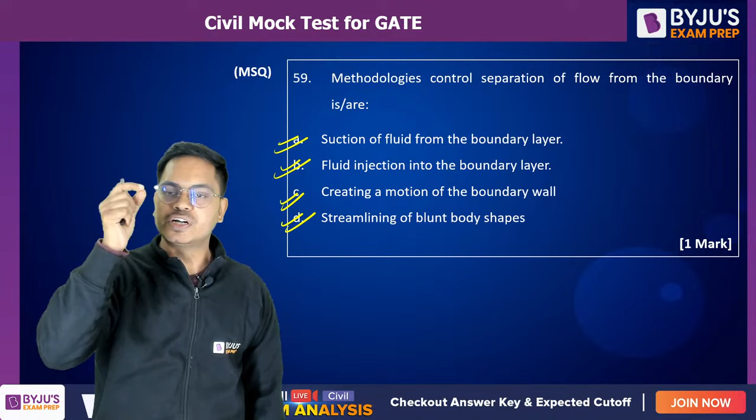अगला सवाल बढ़िया क्वेश्चन है, एक ही सवाल से आपका काफी फ्लूइड मैकेनिक्स रिवाइज होगा। बताइए भाई, कोई डाउट है तो पूछ लो, ABCD अगर डाउट है तो।

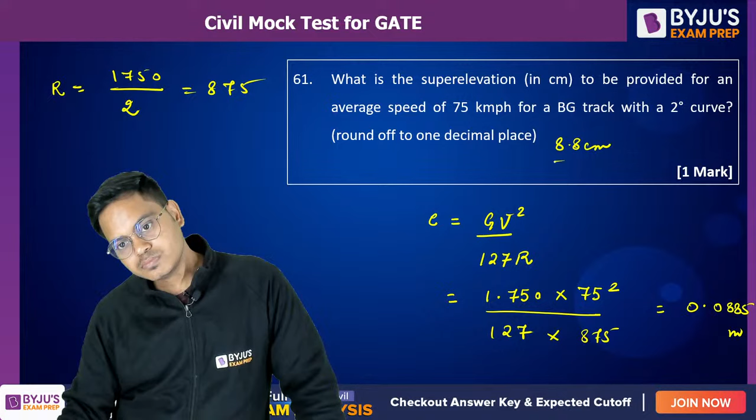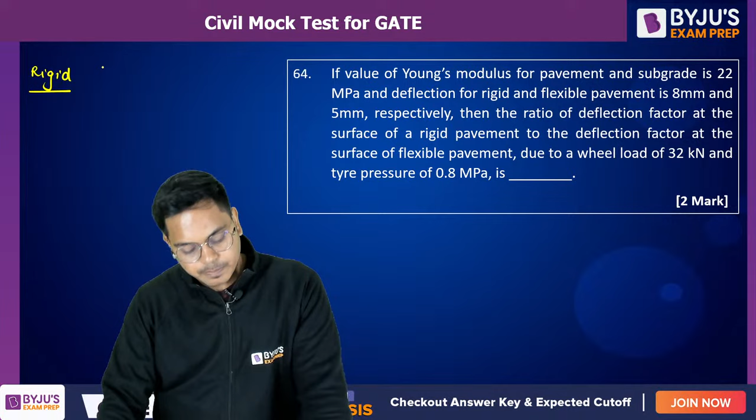ठीक है, सबसे पहले रिजिड पेवमेंट की मैं बात करूं अगर, या रिजिड प्लेट की बात करूं, पेवमेंट लिखा गया है। ठीक है, ये हो जाएगा आपका 1.18 PA by ES into F2, ये F2 चाहिए मुझे।

This is what I need because delta is given. Delta is given as 8mm. And for flexible, it is 1.5 PA by ES F2. Delta which is given as 5mm.

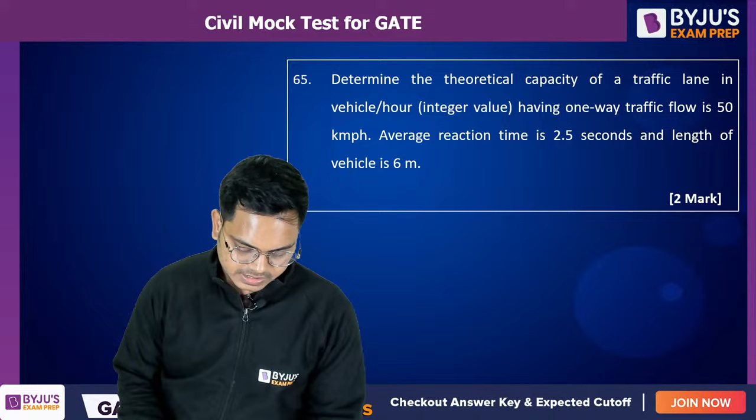This is a simple concept. We know that capacity equals 1000 by S into V. V is 50 kilometer per hour. Very good. But what is the value of S?

One way is this. Tell me, should I use this or not? No. Yes, very good Mukul, S should be SSD plus L in this case.

Put the values: 0.278 into V into TR plus V square by 254F plus 6. From here you get the SSD value, whatever it is. Mukul, you must have calculated it, tell me once what is the SSD value. Calculate it quickly, I haven't calculated it. 100.36.